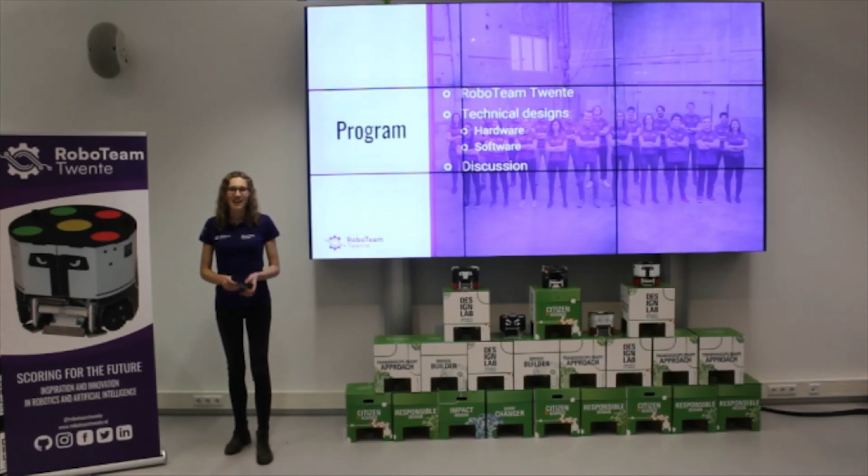Our team this year consists of 25 people, and we are a very multidisciplinary team. We come from various different backgrounds and different studies, and also from different universities. Our team consists of people from the University of Twente, as well as from Saxion University of Applied Sciences.

Because our team is so multidisciplinary, we have split our team up into 7 different sub-teams. I will be going through each and every sub-team individually to show you everyone in our team. First of all, we have the management sub-team, which me and Lotte are part of. But next to that, we also have a manager of external affairs and a financial manager.

Next to that, we have a mechanics sub-team, and they focus on the mechanical components and the structure of the robots. Then we have the electronics sub-team, which focuses on the electronical components in the robot to make sure that the mechanical components actually work. Then we have the control sub-team, and the control sub-team focuses on making sure that our components do what we think they are supposed to do.

For example, kick at the right speed instead of at a speed we cannot predict. So they use feedback for that.

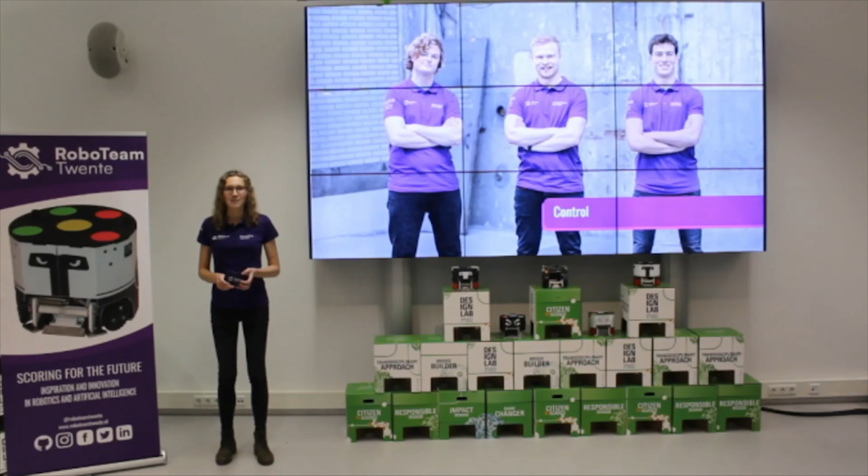Then we have our artificial intelligence sub-team, which focuses on the software of the robot. But more importantly, they focus on the brain of our robots. So they really make sure that our robots are able to think for themselves and that they can act to their surroundings without us having to interfere.

Then our last technical sub-team is the technical challenge team. And they focus on a technical challenge that we get from the RoboCup. The RoboCup is a competition which we'll enter, but I'll tell you more about that later in this presentation.

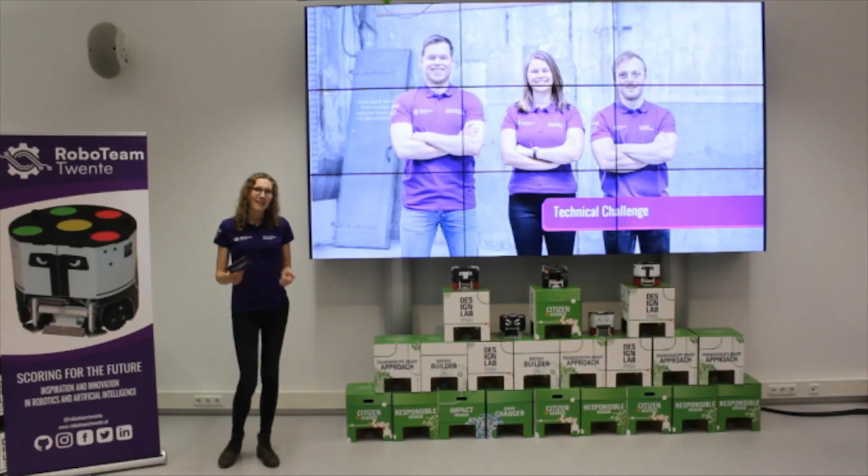Then lastly, we have our public relations sub-team, which focuses on the public image of the RoboTeam and also on presentations such as this one. And they've been working hard on the rebranding as well.

So, with this large team of 25 people, we hope that this year again we can inspire and innovate in the fields of robotics and AI for yet another year.

So the first thing I said was innovation, and innovation really is a big part of what we do as RoboTeam Twente. With innovation, we want to use all the knowledge that we get during our studies and give back to society. We want to make sure that with all this knowledge we can help society forward and use it in practice as well. So one of the ways in which we do that is by entering the RoboCup.

The RoboCup, if you do not know it, is kind of like the World Championships of robot soccer. Next year it will be held in Bangkok, in 2022. For this year, we want to qualify in the small size league, which is quite comparable to soccer, but of course is still different. In this league, we compete with 11 robots against 11 robots from a different team, and teams from both universities as well as companies compete.

For the small size league, we're also very restricted in size, so we have to deal with a very small robot of about 18 centimeters in diameter. And that brings up a lot of technical challenges, which Lotte will discuss more in detail in the technical part of this presentation.

What we really like about the RoboCup is that it's very accessible. You can see how innovation is performed in something like soccer. When I tell you that we do robot soccer, many people already get quite excited, and that's what we want to do as well. We want to be able to show what robotics and AI can do in such an accessible way, such as soccer.

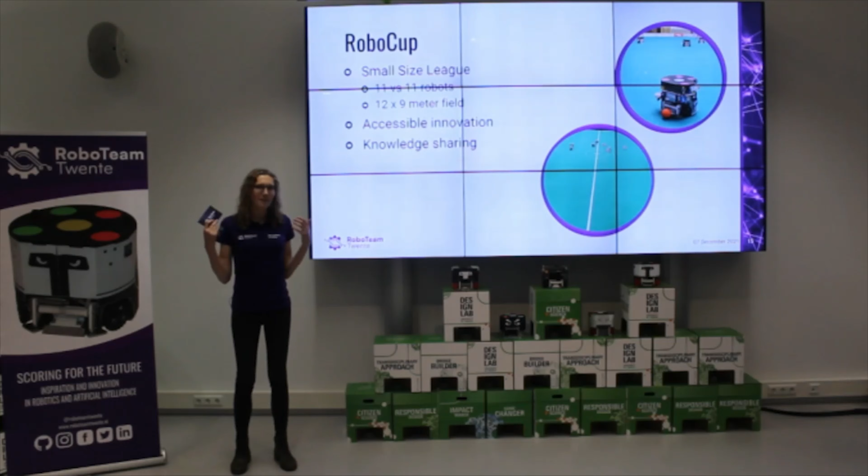And secondly, the RoboCup really encourages knowledge sharing. For example, this design presentation is live streamed on YouTube, and it's also publicly available, and other teams are free to watch it and see what our designs are. That's also an integral part of the RoboCup, where you have to make things open source, such that other teams can look at it as well.

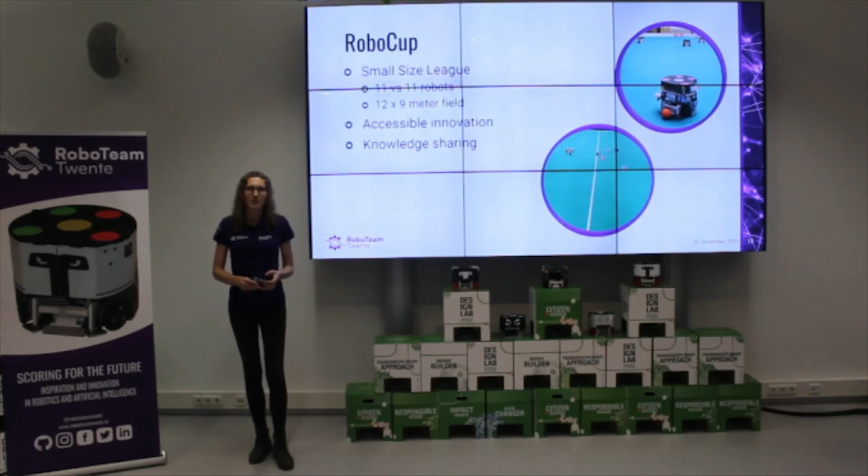And with that, we want to make sure that we can move forward as society and not really keep all our innovations to ourselves and keep it within a company. We really like that vision, and we think it really suits our team as well.

The second part that I discussed was inspiration, and that's also a very important part for RoboTeam Twente. With innovation, or with inspiration, we really want to make sure that both the new generations as well as the older generations are as enthusiastic about robotics and AI as we are. So we do that in different ways.

One of the ways in which we try to inspire people is by giving workshops. We give workshops at various different levels in society, for example at primary schools, but also at high schools or universities, but even companies. So we try to tailor our workshops to different levels so people can get in touch with what robotics and AI has to offer and get excited about it just as much as we are.

Another way in which we try to inspire people is by going to many events. These can be events from partners, where we go to partners of us and talk about what we do to show all the people there what we as a team can accomplish. But also we go to things such as symposia and public events.

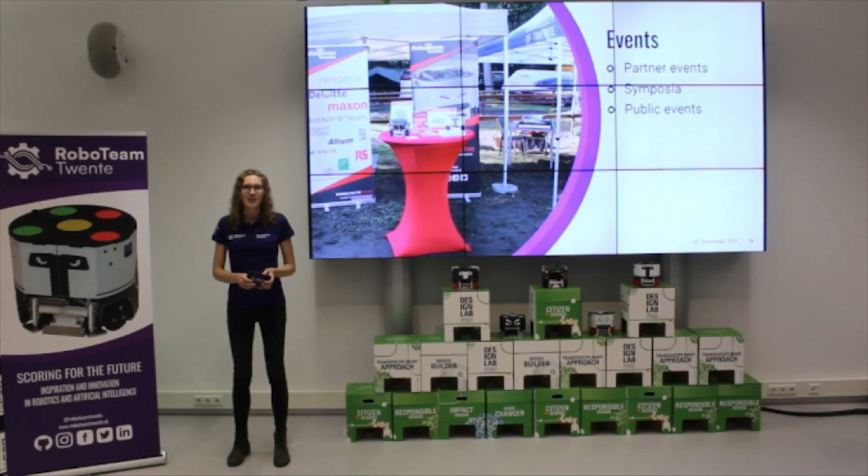A good example might be that we went to Military Boekelo, which was a horse riding event, which had nothing to do with robotics, but we were there with our robots, and we were able to talk to a lot of people there and show them what our robots could do. We do think we inspired quite some people about seeing how these robots function, and it was really fun to be there. I think a lot of people also enjoyed having this cool thing to show. So that was actually already it for the introduction about RoboTeam Twente.

And now I would like to give the word to Lotte to go more in detail about the technical plans of this year.

My name is Lotte Steenmeijer, and I'm the technical manager this year. It's my job to oversee all the technical sub-teams and make sure they stick to the technical planning, and that at the end of the year we'll have working robots and hopefully do our best at the RoboCup in Bangkok. So I'll be telling you about the designs we'll have this year, which hopefully we'll take with us to Bangkok.

To actually play matches of soccer, we need to have robots, 11 of them to be exact. These 11 robots also need to be able to do a variety of different functions. These functions are made possible by our different sub-teams: software, control, electronics and mechanics.

The software part is the brain of our robot, and it figures out where the robots need to go and sends commands to the control part. Control is the code that runs on the actual robot, and makes sure that if you say go with that speed, it actually goes with that certain speed.

Then we have the electronics part, which makes sure the mechanical parts do as they're supposed to do and also have the power to work. The mechanical parts are all the motors and wheels and the physical stuff on the robot.

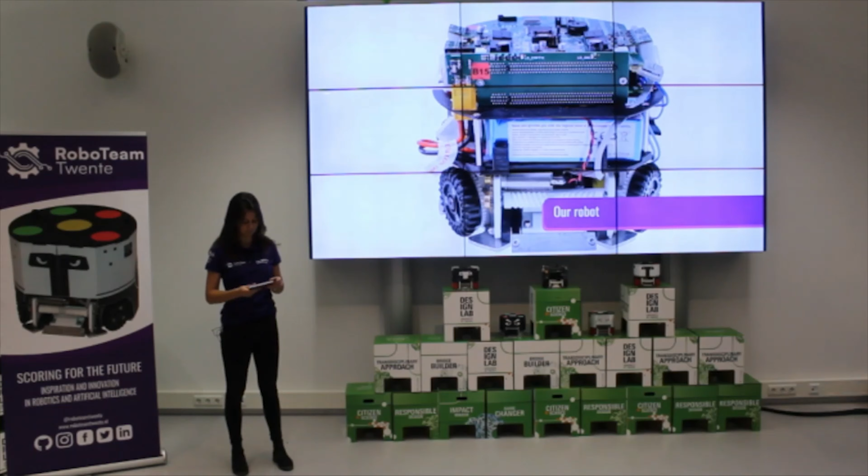The first thing the robot needs to be able to do is drive around. As you can see on the video, our robots can drive around very flexibly in all kinds of different directions. This is made possible by our 4 Omni wheels, which are driven by our Maxon motors.

Omni wheels are a special kind of wheel because they're one big wheel with all kinds of tiny wheels on them. These tiny wheels, which are perpendicular to the big wheel, make it possible to move in all different directions. This is very useful during play because you can quickly move around and switch the direction you're facing.

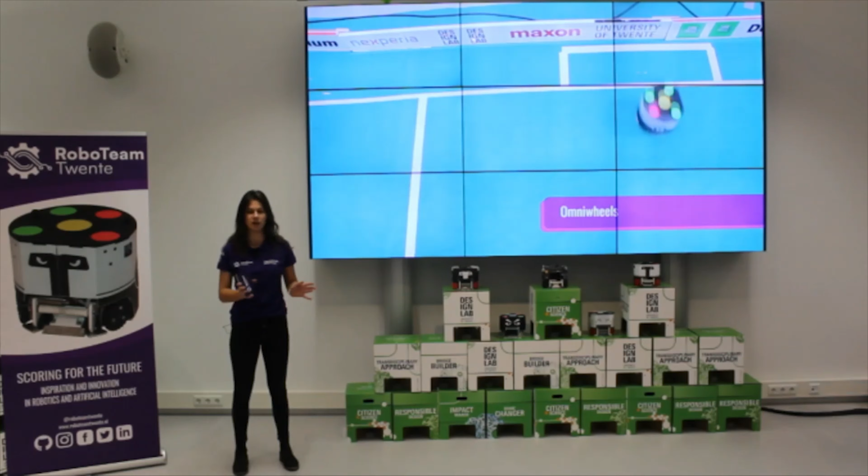Another thing a robot needs to be able to do is kick the ball. As you can see on the video, this is a horizontal movement that sends the ball forward, used for passing to other teammate robots and also for shooting the ball into the goal, which is very nice if that happens. The kicker is actuated by a solenoid, but what is a solenoid?

Think of a solenoid like a plunger in a pinball machine, where you pull it back and it shoots out. That's kind of what the solenoid does - it has a part that sticks out which shoots the ball. We'll talk more about solenoids later in the presentation, as we'll be doing some improvements to them this year.

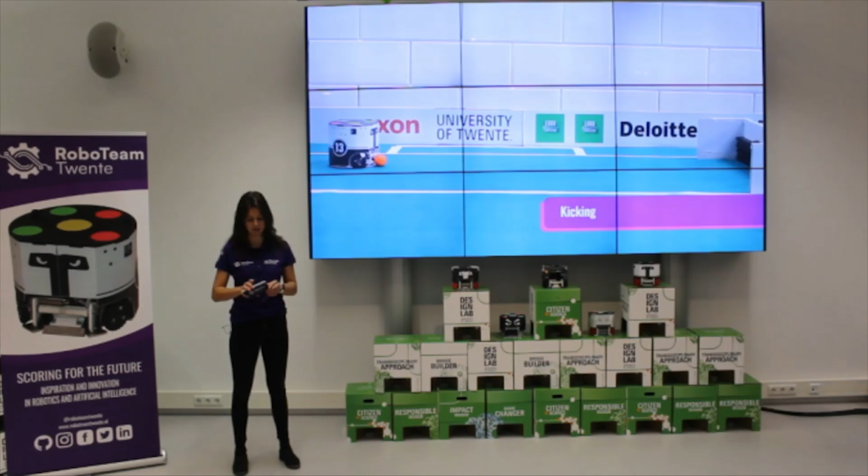Chipping is the second thing the robot needs to be able to do. As you can see on the video, it's not only a horizontal movement, but also a vertical movement. This is mainly used by our keeper to defend the goal easily.

If an attacking robot from the opposing team comes at you with the ball and shoots it at the keeper, and the keeper just shoots it back horizontally, it might bounce off the attacking robot and back into the goal, which you don't want. So by using the chipper, you chip it over all the other opposing robots and make sure the ball is safely removed from the goal.

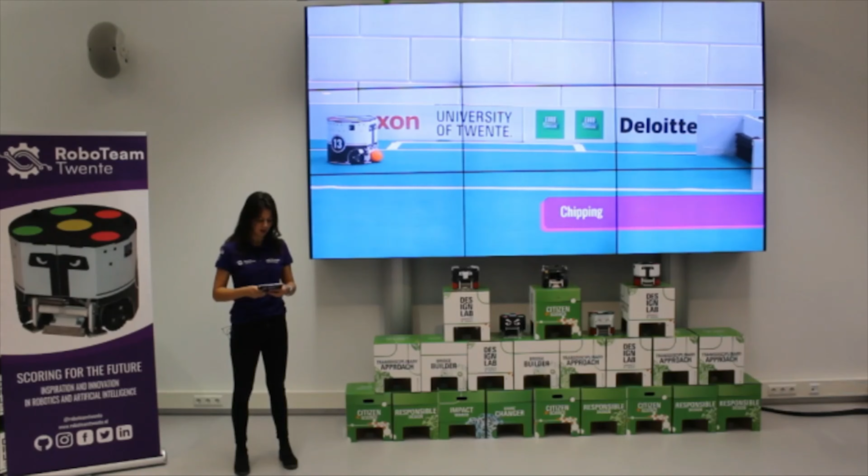The chipper is also actuated by a solenoid. Another thing the robot needs to be able to do is dribble the ball, which you can see on the video.

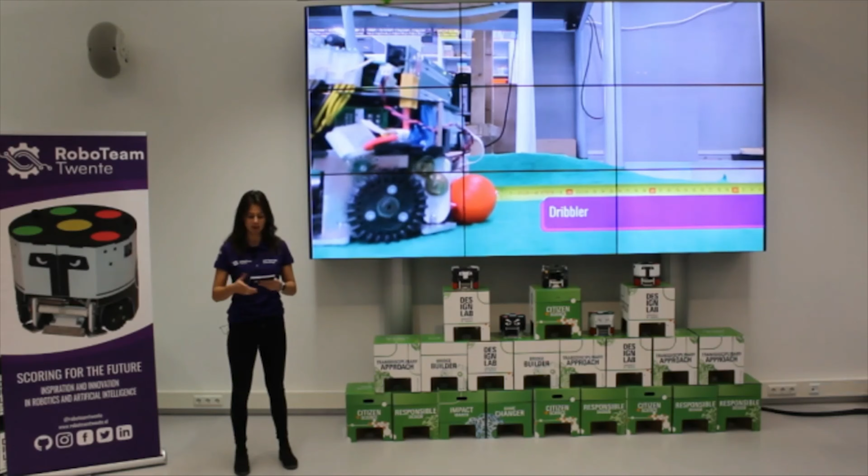The dribbler is also powered by a motor, and it generates backspin on the ball, which makes the robot able to retain the ball. This is nice because you can move the ball around on the field, useful if you want to move the position of the ball or move the robot with the ball to another location on the field.

The dribbler is housed in the front assembly, which also houses another important part for a robot, namely the dampening. If a ball is shot at the robot and it wants to retain that ball, and you don't have dampening, it will just bounce off, which you don't want to happen. So that's why we have the dampening in the front assembly. We'll also discuss this a bit more later on, because we'll be talking about this for the new designs.

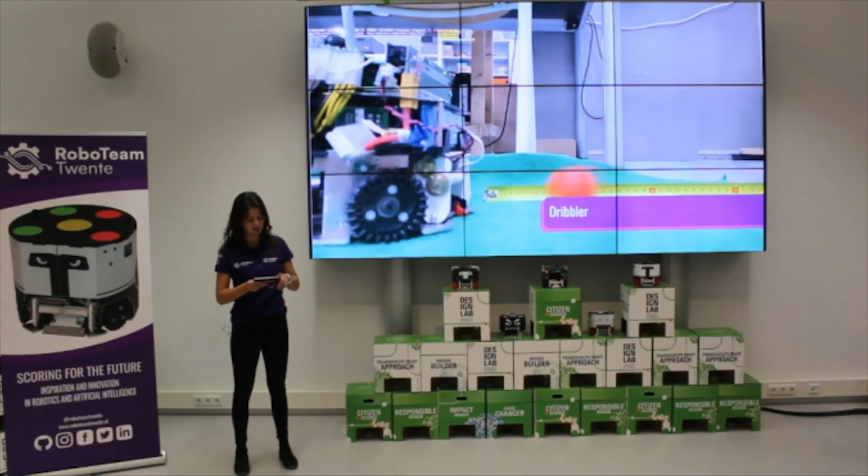Lastly, the electronics of the robot. We have 3 main circuit boards, namely the top board, the bottom board, and the back board. The top board is mostly used for controlling the movement of the robot and also the communication with our base station, which is a different circuit board used to control all the robots. These electronic parts are used to power and also control the mechanical components of the robot.

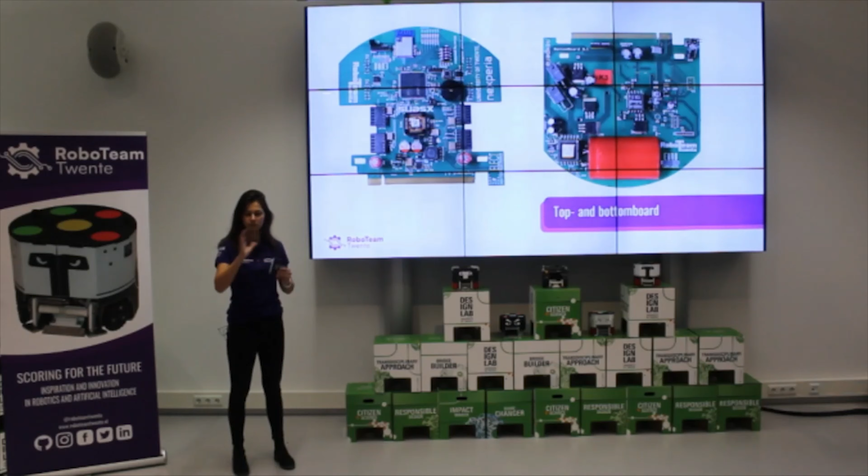The second board we have is the bottom board, which you can see on the top right of the slide. The bottom board powers the kicker, the chipper, and also the dribbler, and also does some power regulation. You can see a big red thing on the bottom board - this is the capacitor, which generates high voltages, used to power the kicker and the chipper. As you can see on the slide, the top board is actually placed at the top and the bottom board at the bottom of the robot.

So that was it for the explanation of the current hardware, but we'll be also looking a bit more into what we improved upon this year. So now we'll go over to our modular design, which was something we improved upon this year.

In matches, we only have a limited amount of time to fix our robots, because same as with regular soccer matches, soccer players end up on the ground and they are kind of broken. That can also happen with our robots. So in this limited amount of time, it should be easy to repair the robot and make sure it works again.

The modular design groups the functionalities in different modules, which places the mechanical and electronical parts together. By using these modules, it's also easier to diagnose what's wrong if something of the electronics breaks. This year we'll lay the basis for these modules, and next year and hopefully also the coming years we'll keep on improving those. So now we'll go over the mechanics a bit more, what we want to improve this year.

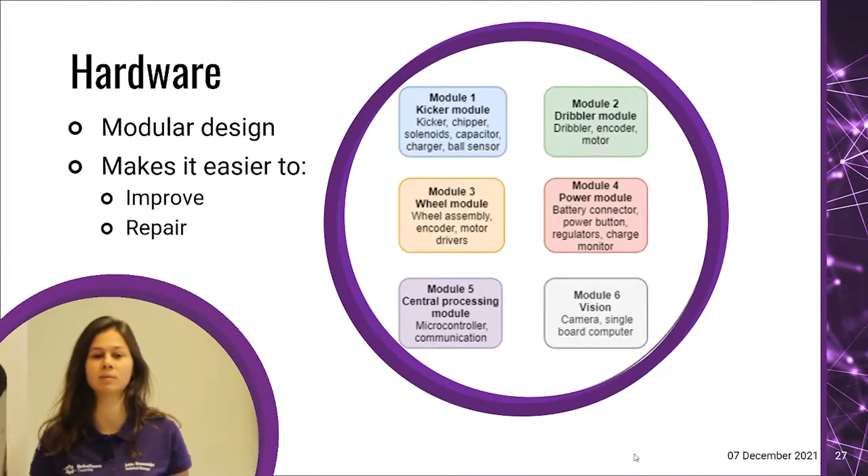There are two main things which we'll be improving upon: one of them the front assembly, and the second one the solenoids. The front assembly is the thing that houses the dribbler and also the dampening behavior of a robot. The solenoids are the ones that make sure we can actually kick and chip the ball.

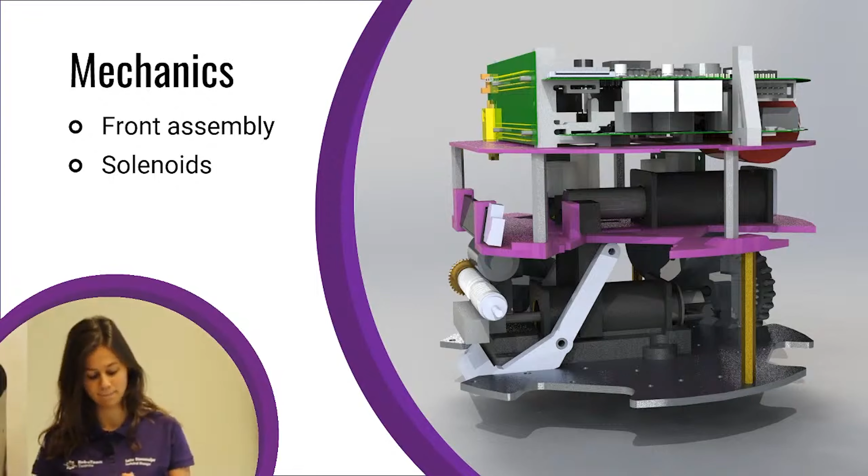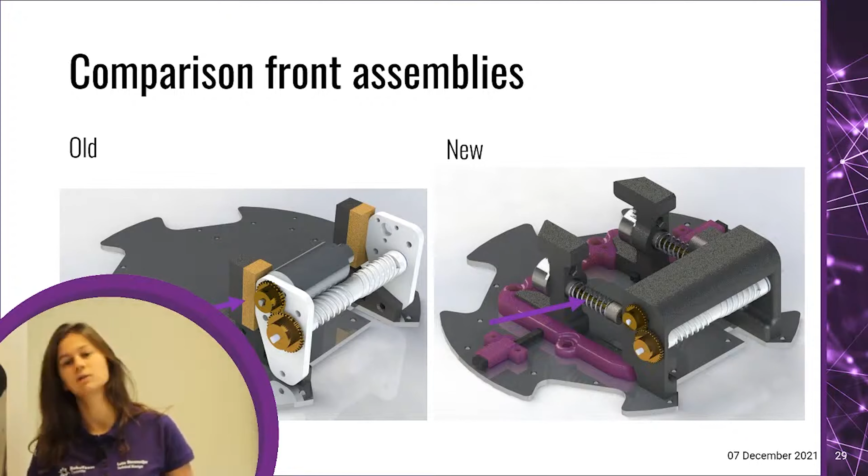This is because of our modular design. The new front assembly will be better for on-the-go repairs, and will also have more reliable ball impact absorption because of our inerter in the design.

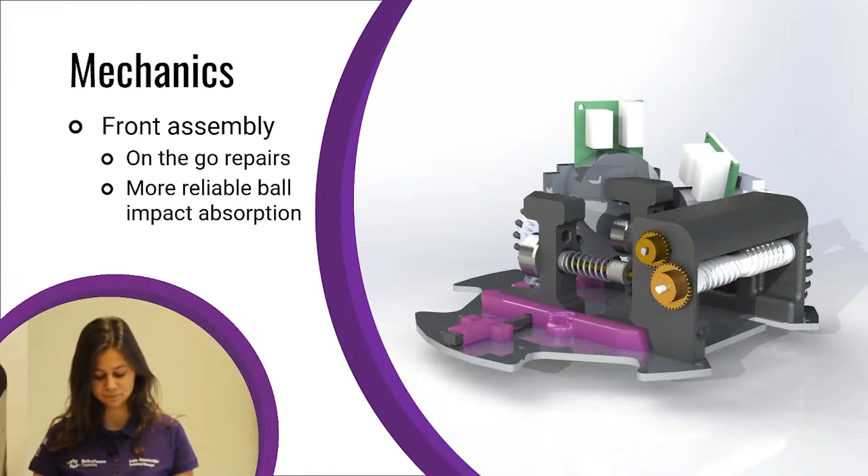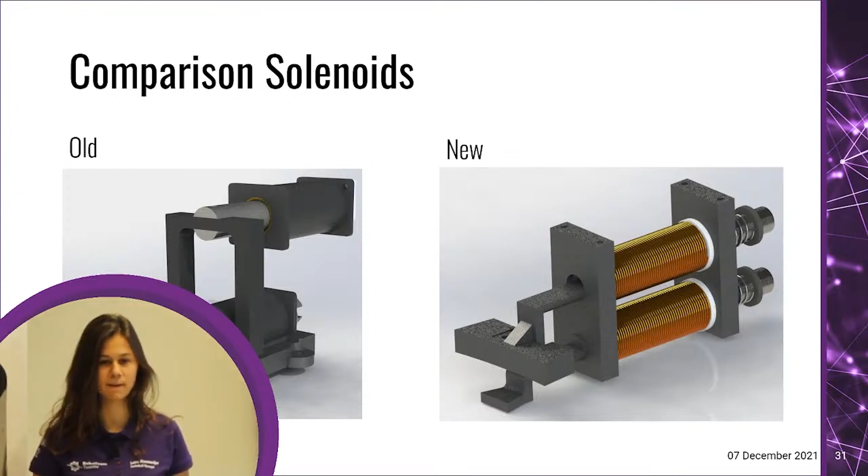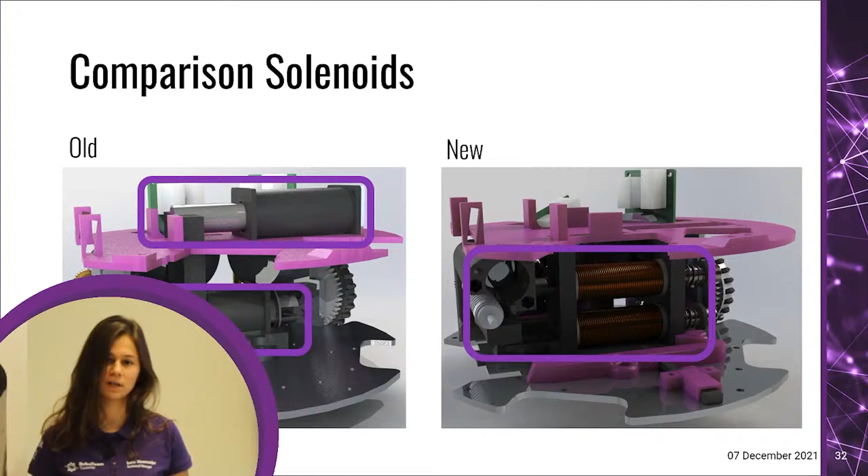Now you can see the solenoids in the robots. On the left-hand side again the old ones, and on the right-hand side the new ones. The old solenoids were placed on the bottom and the middle plate, and the new ones are grouped together both on the bottom plate. So this also saves space, here you can really see it.

So the solenoids: the new ones will be way more compact, and instead of using off-the-shelf solenoids, we'll be using solenoids which are custom made by us, which will give us more space in the future to improve them further and do everything we want with them.

The new ones will also have better weight distribution because they're both placed on the bottom plate, instead of being split up in the middle and the bottom plate, giving us better weight distribution.

If you're one of our partners, or you're working at a company and think you can really help us with this, we would like to know, because we would like these solenoids to be produced by a company for more consistent and reliable behavior. Please join us at the end in the discussion if you have more ideas about this.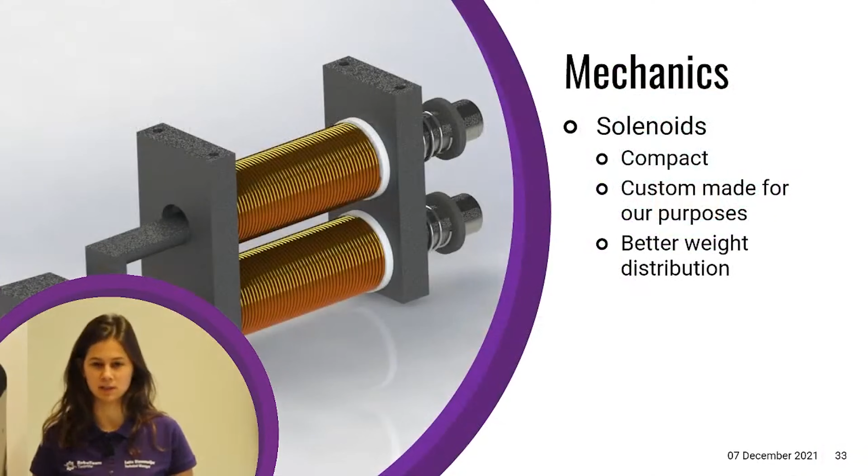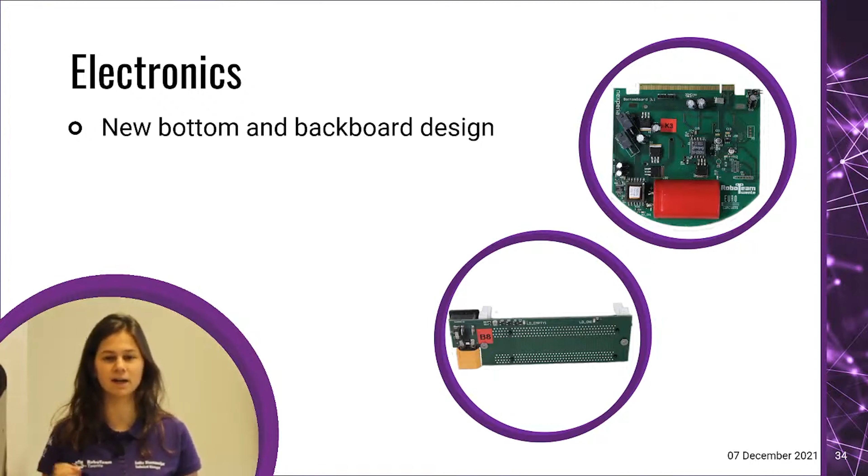Now we've gone over the mechanical parts of our design, and we want to take a closer look at the electronic parts. We'll be designing a new back and bottom board this year. The backboard connects the bottom and the top board, and also has the connector for the battery. The bottom board will be powering and controlling our kicker and chipper, and also the dribbler.

So, what was wrong with the old ones? The old bottom board especially would break quite a lot, and was very hard to diagnose where it went wrong, because everything was grouped into one big board instead of having different modules based on functionality.

So we'll be making 3 smaller circuit boards instead of one large one. The new design will be more robust and reliable, and we'll also add a voltage meter. This is because we use special batteries which you can recharge quite a lot, but if their voltage gets too low, you can't recharge them again. That's why we added the voltage meter, and hopefully this will save some lipos.

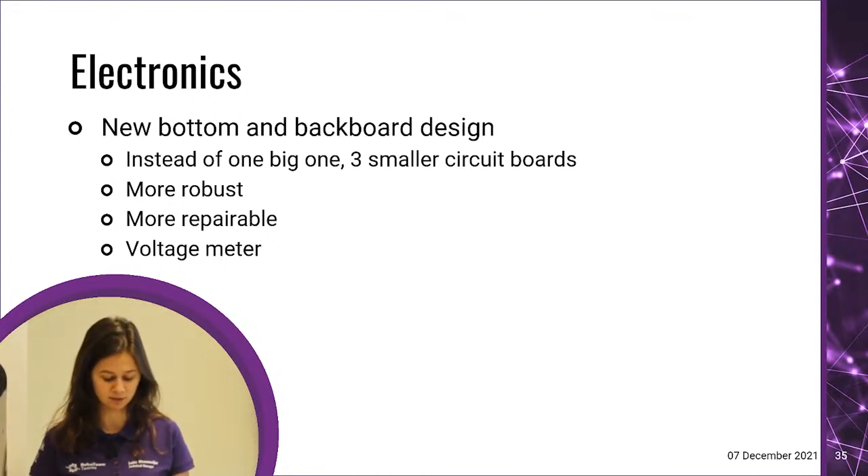The power board will have some regulators which will regulate the 24 volts into 3 and 5 volts. This is the easiest one to break, so it's very nice that it's a separate board, so we can easily swap it out.

The kicker and chipper board has some high voltage circuitry on there, so also an isolator, because the high voltage power can cause other things to break, so that's why it's nice to have an isolator on there. The front assembly board also has a connection for the encoder motor of the dribbler, which will be nice in future for control code, which I'll explain a bit later in the talk.

So now we go over to software.

As we've discussed the mechanical and electronic parts already, those are powered by the control code, which mostly runs on the robot itself. The control code also gets commands from our AI, which runs on a computer. The AI calculates what move our robot should make next and sends this to the base station, which is connected to the computer and sends the commands to the robots. The control code makes sure that when you say go with this speed to a certain location, the robot actually does that.

So now over to the control improvements. What we did this year: we added a new dribbler controller, and we also redesigned the control code architecture.

The dribbler controller: our old dribbler could only really turn it on and off because we didn't have any connection for the encoder. But with our new connection for the encoder on the new circuitry board, we can also create a dribbler controller, and we can regulate their speed. This regulated speed will improve our ball handling significantly, and that's why we want to make the dribbler controller.

We'll also be working on restructuring the hierarchy of the control code. This will make a more robust and easy to maintain control code, which will hopefully help future generations work on the code and fix it.

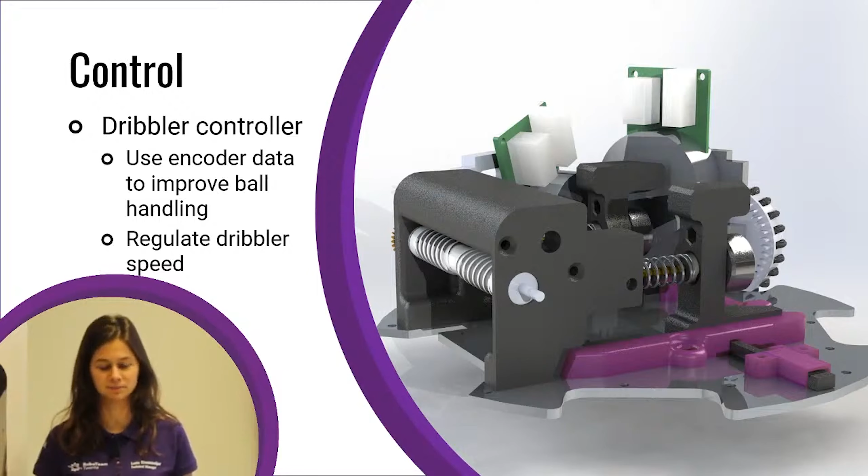We have one autonomous control, which runs on the computer. This acts as the brain for the robots and calculates where they need to go on the field. This data is sent to the base station, and you have the cameras, which are connected to the computer. The computer calculates the positions of the robots on the field, which is then sent to the artificial intelligence program, which calculates based on the positions where the robots need to go next. This data is then sent to the base station, which sends it to the robot, which will eventually perform these actions. But how exactly is our artificial intelligence program working?

First, we pick a play, or the AI will pick a play which is best in this situation. For example, this can be an attack play. This will give certain roles to different robots. One of these roles can be, for example, an attacker role. The role consists of multiple tactics. One of these tactics can be get the ball, so our robot will go to the ball and get it with the dribbler and all the other parts we discussed earlier. The tactic then consists of multiple skills.